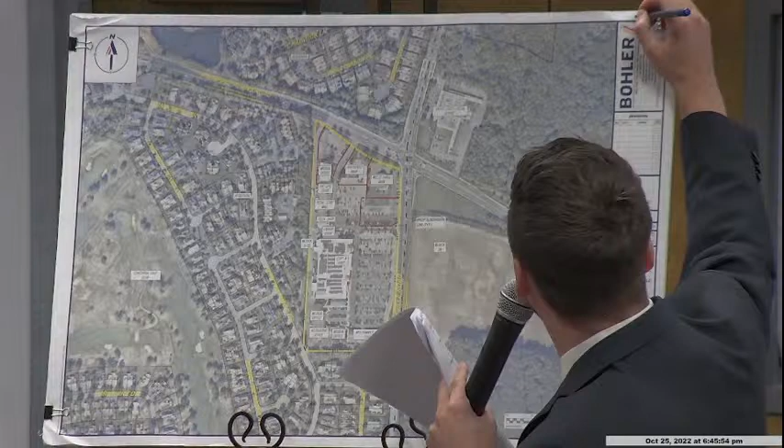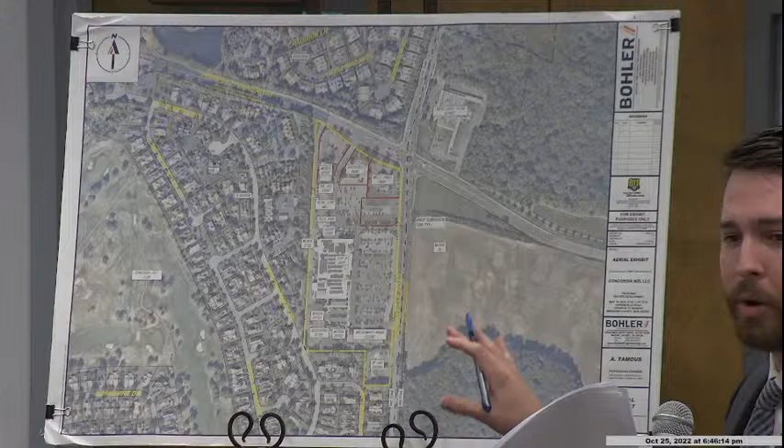This is an aerial image taken from approximately early October, which shows the site in question outlined in a yellow boundary on this plan. The site is located at the corner of Perrinville Road, County Route 625, and Prospect Plains Road, County Route 614. Surrounding the site you have residential, multifamily, and townhouse development to the west and south. On the opposite side of Prospect Plains Road there is additional residential housing. Catty corner to the subject site is the USPS Postal Service building, and to the east, on the opposite side of Perrinville Road, is an open farm field.

As Mr. Herbert mentioned, we are located at block 27.02, lot 27.01, taken from tax map page number 10. The site is located in the PRC zone, the Planned Retirement Community Zoning District. The existing use on the site is made up of many uses. The primary use is the existing Stop and Shop grocery store, and the surrounding uses consist of smaller retail uses such as a pizza shop, Mrs. Kumar's Indian cuisine, some medical office buildings, and a couple of bank parcels. It really functions as a shopping center, which is what the previous approval considered in 1983 for this project. It was classified as a shopping center based on the types of uses and the shared amenities provided on this site.

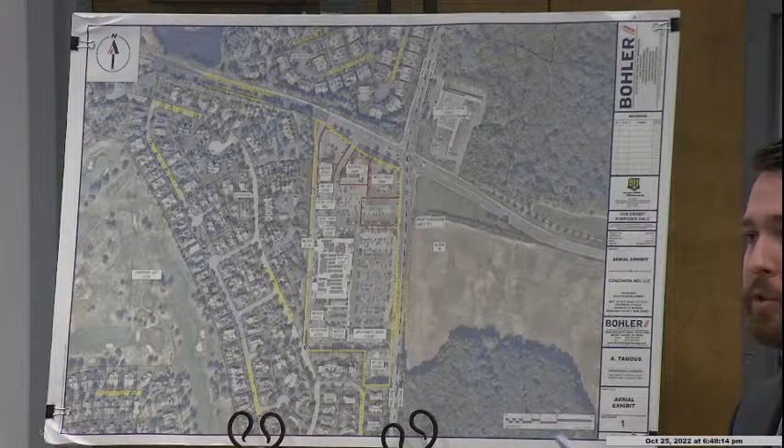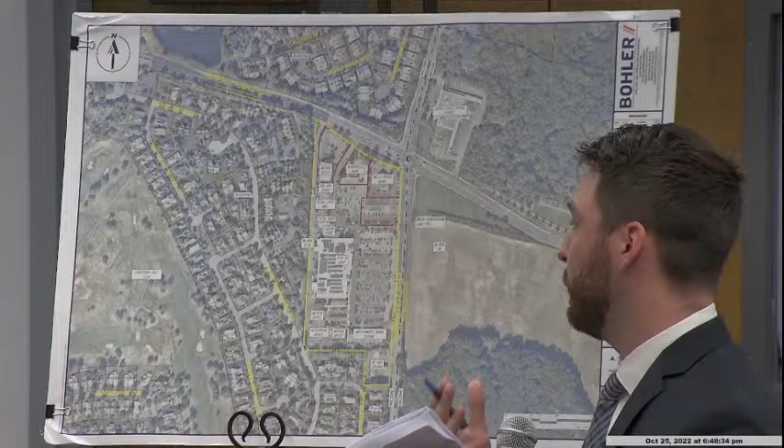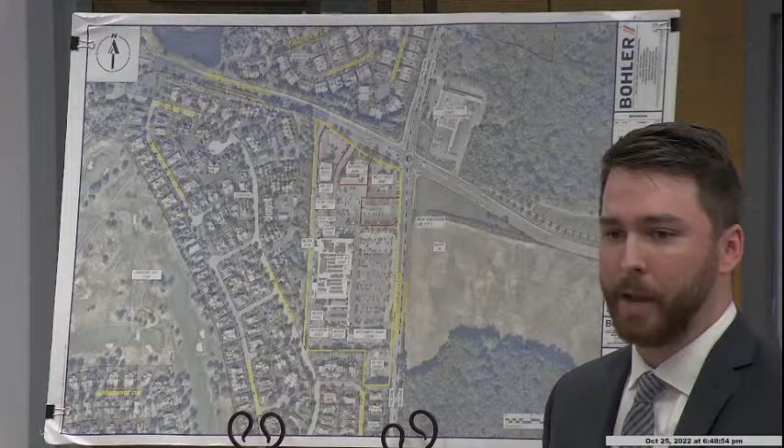You can see, maybe in detail, the number of parking spaces on the site, which we're going to be talking about a lot tonight. Currently there are approximately 646 parking stalls, based on the survey prepared as part of this application. However, the previously approved number based on that original approval for the shopping center was 602. Most of those parking stalls are utilized by the large use on the site, the Stop and Shop grocery store. You can see from this aerial image that most of the cars parked on this site are located in front of the grocery store. So one of the things we're trying to achieve with this application is to provide a little more parking in front of the Stop and Shop where it's most needed.

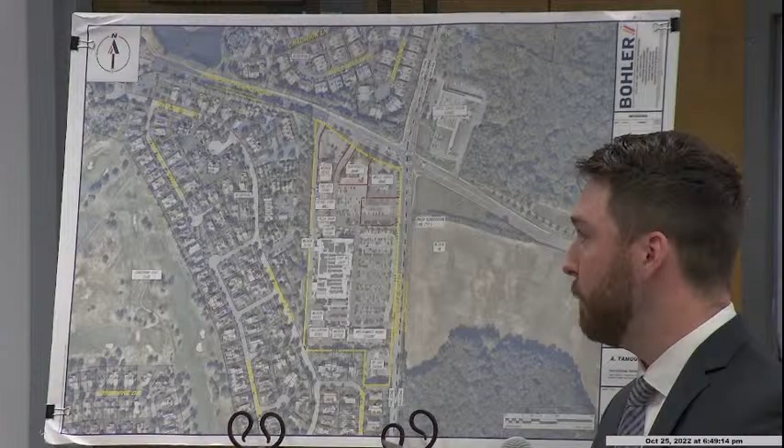You can also see on this plan with the red boundaries what the proposed subdivision for this project will look like. As Mr. Herbert mentioned, we are applying for a major subdivision application, which will add additional parcels within the existing shopping center. Those are outlined in red here, and I'll get into that once we turn to the proposed conditions shortly.

Access to the site is...

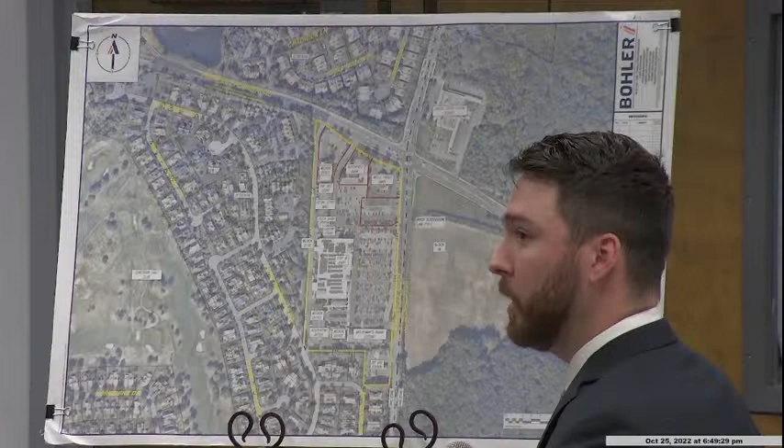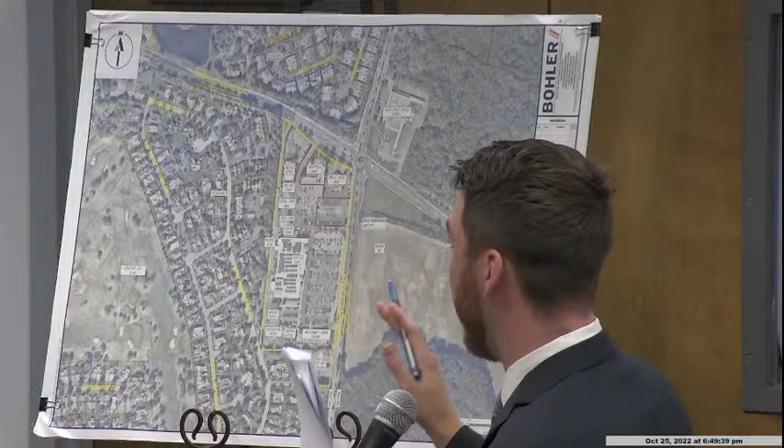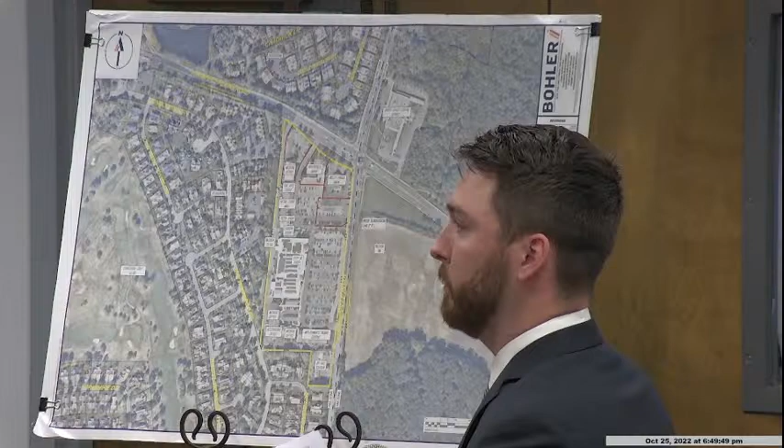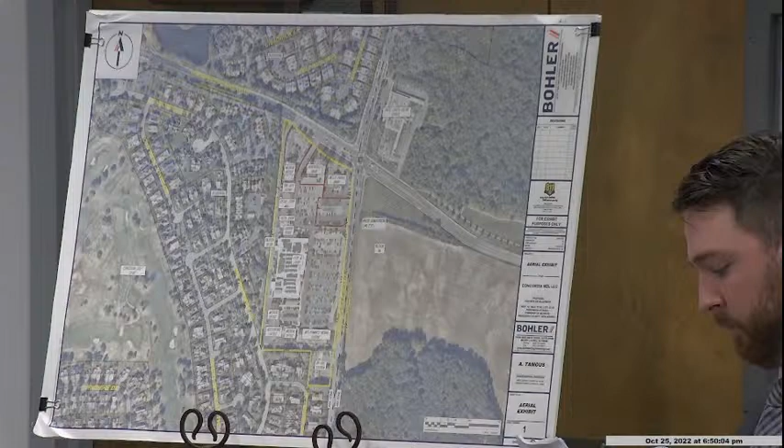I want to describe it for the record as well. I'd like to do that when we get to the proposed condition, you can see that a little bit better. This is what I'm going to recommend: after he gives his testimony and it's done, we'll take a recess. At that point we'll give the public a chance to see the outlines up close instead of interrupting as we go along. Otherwise we're going to be here for many nights. So let's go through the process. Everyone will get a chance to view it and see what's going on before anything happens, I promise you. Please continue. Thank you, Mr. Chairman.

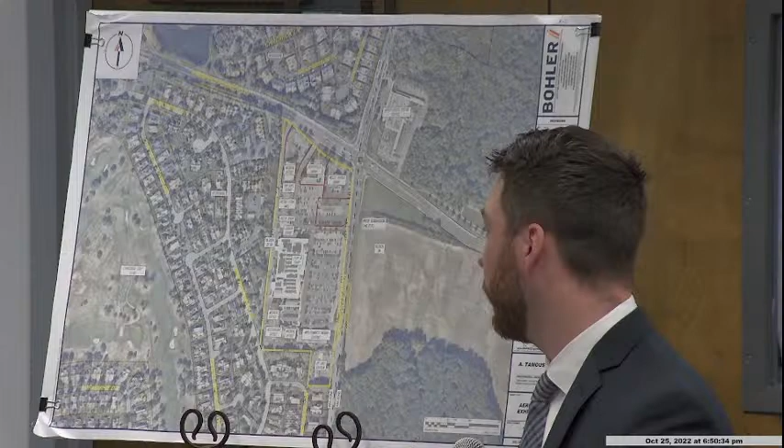Lastly, on the existing conditions, I want to talk about access to the site, which has a handful of driveways. There are 2 full movement access driveways located on Prospect Plains Road, and also 2 full movement driveways into the shopping center piece of this project along Perrineville Road. There are a couple of additional access points to the existing BP gas station located at the southeast corner, which are not to be changed. For that matter, none of the existing access points on the site will be changed as part of this application.

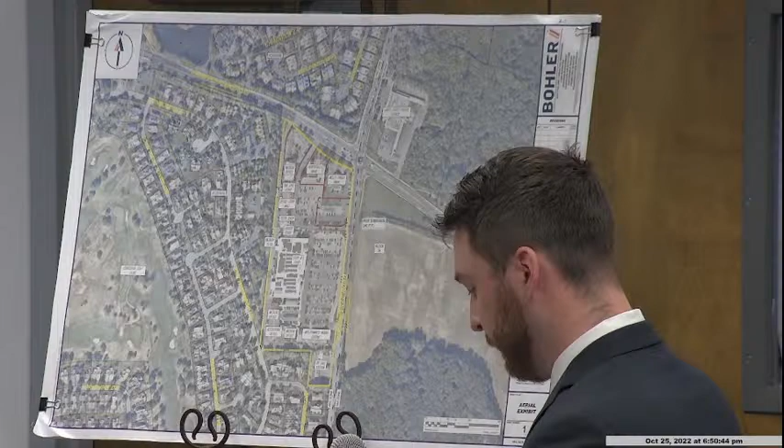With that, I'll move on to the proposed conditions unless the board has any questions on the existing. When you're done, we'll get to those. We'll get to the questions.

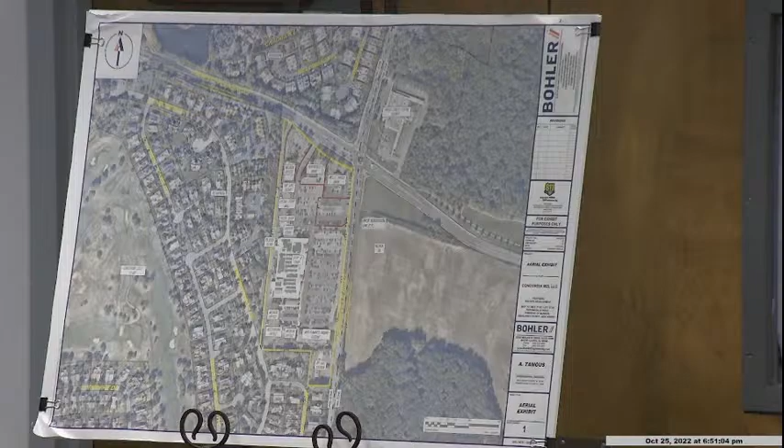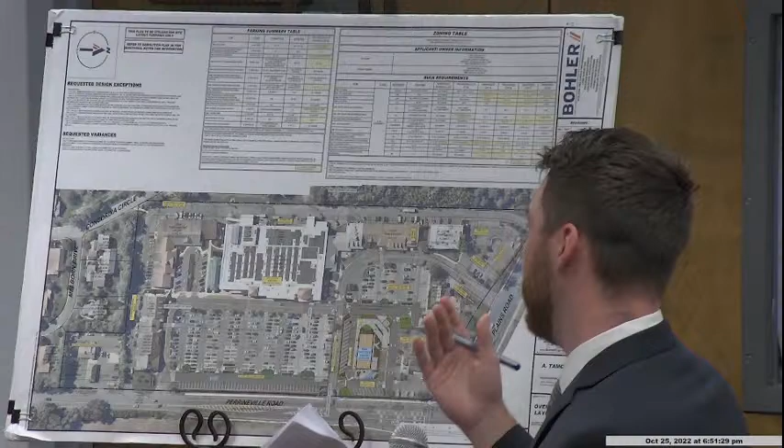Yes. This exhibit I will mark as A2. The exhibit is the overall site layout plan, sheet C-301, dated June 25th, 2021, last revised July 12th, 2022. This exhibit is a colorized rendering of the submitted site plan drawings that we provided to the board as part of this application. It's colorized for visibility and to show what the site may look like once it's constructed, as well as to provide a superimposed landscaping plan that was submitted, all for reference on one page.

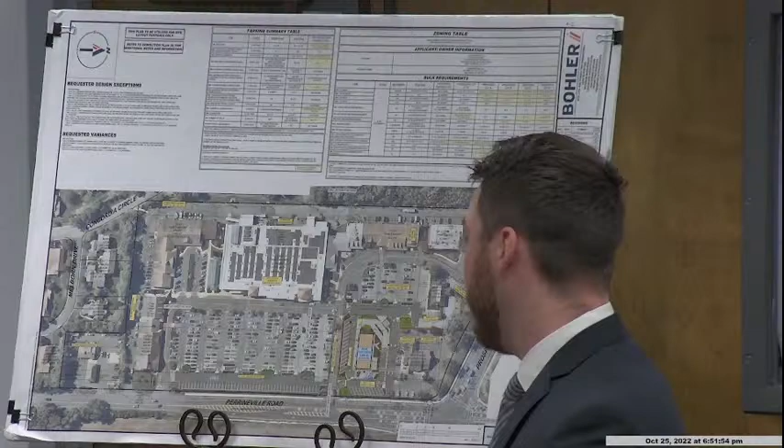As Mr. Herbert mentioned, we are proposing to construct a 4,439 square foot fast food McDonald's restaurant, which will contain 67 seats and provide a double lane, side-by-side drive-through configuration, which McDonald's considers their most efficient configuration. You see it very frequently across the nation and really across the world.

Let me turn the page here. The proposed restaurant is going to be located towards the northeast corner of the site. North is directed to the right side of this page, so a 90-degree rotation from the previous exhibit. The McDonald's restaurant will be located at the northeast corner, closest to the Prospect Plains Road and Perrineville Road intersection, adjacent to the existing Wells Fargo Bank.

The reason we've selected that location — there's a couple of reasons, but most importantly, it's the location on the site that currently utilizes the least amount of parking stalls or has the least parking demand. Looking at the aerial exhibit, you'll see that area of the site is very infrequently used for parking, making it a prime location for this restaurant.

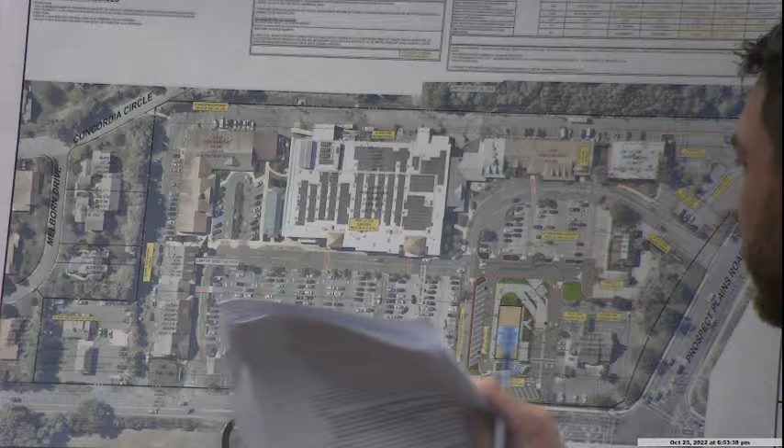Additionally, on the other side of the entrance driveway on Perrineville Road, further south of where this proposed restaurant will be located, we are proposing some site plan modifications to increase the total number of parking spaces in front of the existing Stop and Shop grocery store. I know it might be difficult for the public to see, but I'm sure you'll see it when we take a recess, as the chairman mentioned. This design, from an engineering standpoint, is much better for circulation and also provides an additional 20 parking spaces in front of Stop and Shop, simply by reconfiguring the parking lot.

We are not proposing a drive-through ATM, which was initially contemplated for this application. We have rescinded that from the application, and in lieu of the ATM, we will be providing an additional 4 parking stalls, which were not shown on the plan as it was submitted.

Just to reiterate, we are proposing a fast food drive-through restaurant, which is a non-permitted use within this zone. While it is similar to the pizza shop and the Indian cuisine restaurant, the drive-through component and fast food nature of this restaurant is not explicitly permitted in this zone. Therefore, we are requesting the use variance for this project.

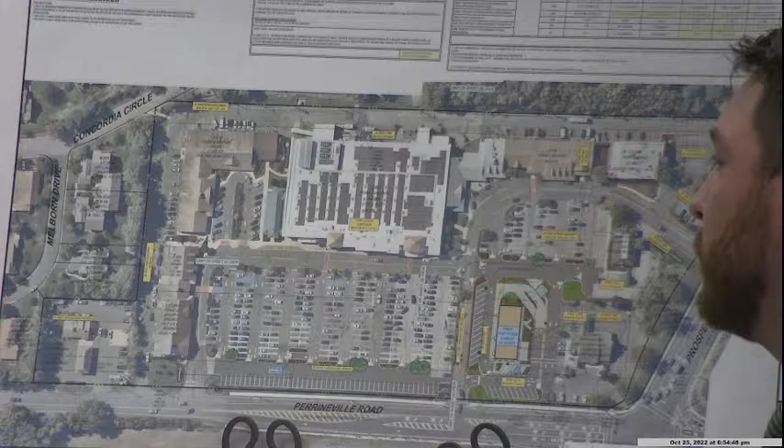The ATM also would have required a use variance application, but that is no longer necessary given the fact that we have eliminated that from the plans.

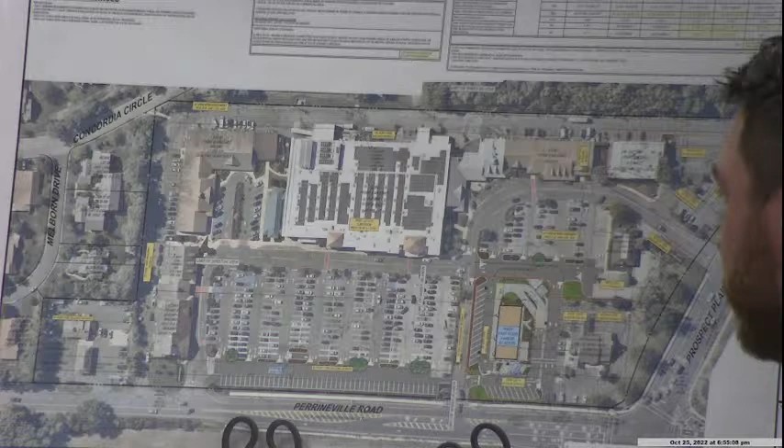I want to cover a couple of additional site plan improvements that were specific questions and comments raised by the board's professionals, which we are agreeing to incorporate. This will hopefully streamline the review through the comment letters as we proceed. One of those was interconnectivity between the proposed restaurant and the existing shopping center.

Previously, and on this plan, there are no sidewalks or crosswalks delineated for public access if you were to walk from the Stop and Shop to the restaurant. So we will be providing those. We will be agreeing to work with the board's professionals to find a suitable location for those, and that will be provided as a condition of any approval that we might receive.

Additionally, as shown on this plan, we are showing an outdoor seating area as part of the McDonald's restaurant. That also is going to be eliminated. That is not needed based on what McDonald's has indicated to us. So we will be eliminating that larger outdoor patio space in lieu of some additional landscaping that will be provided instead.

So the other lots that were proposed to be created as part of the subdivision plan. I'll identify them now. The existing lot 27.01 will be broken into 5 individual parcels, which we are calling lots A, B, C, and D for the first 4 new lots that are going to be out parcels on the northern side of this property.

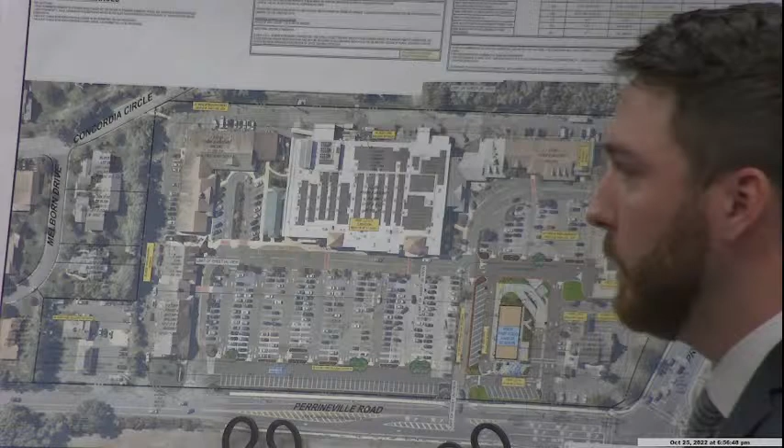The remaining land that will not be included in lots A, B, C, and D will remain as part of lot 27.01, or whichever tax number the tax assessor assigns, and that will remain inclusive of the Stop and Shop and many of the retail uses on the southern half of the site.

The McDonald's restaurant will be located on lot A. Wells Fargo Bank and the surrounding parking and drive-through area will be located on lot B. Lot C will include the existing Liberty Bank and its surrounding drive-through and parking area. Lot D will be the existing medical office building on the northwest corner of the site, also with adjacent parking and circulation areas.

Mike, use the microphone. Counsel, microphone, please. I can reiterate your question.

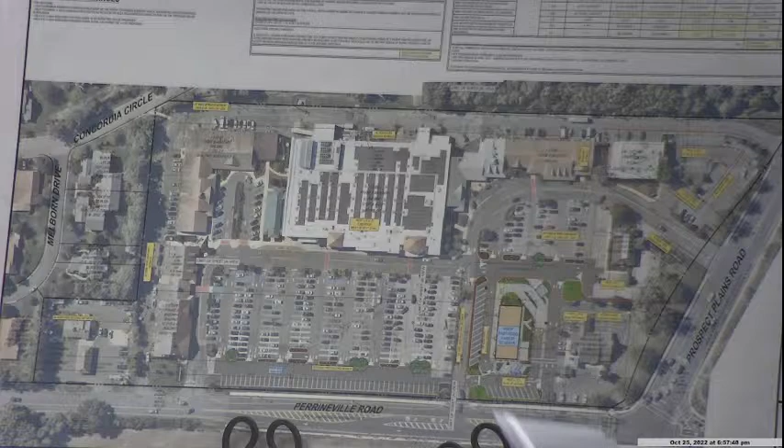Go ahead. His question was, this would be considered an economic or financial subdivision, as we call it in the industry, and the answer is yes. The reason for it is not to separate the ownership or really have it feel as a separate use on the property. It will still function as a shopping center. You will not notice any sort of difference just because of the subdivision. It's more for business and taxable purposes as a financial opportunity rather than to change the use or the feel of the site. Thank you.

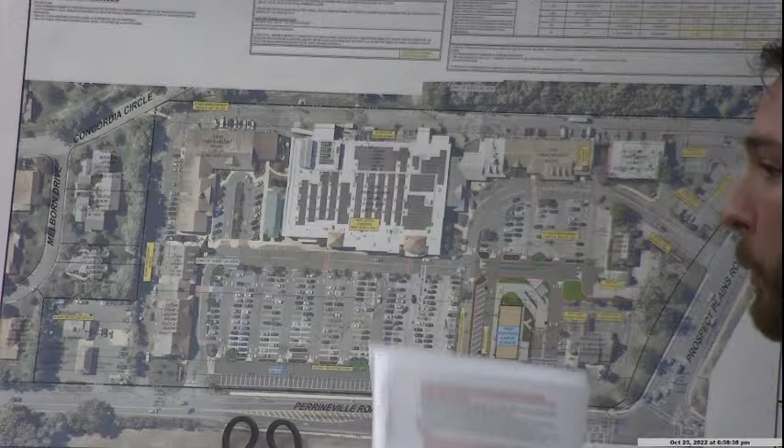So as I proceed, there are a number of variances that we need relief from this board this evening. Rather than go back and forth with interjecting them throughout the presentation, I do have a comprehensive list of all of the variances and the design exceptions that we will be requesting, which I can go through at the end of this, and we do have that list available to present to you, should that be beneficial.

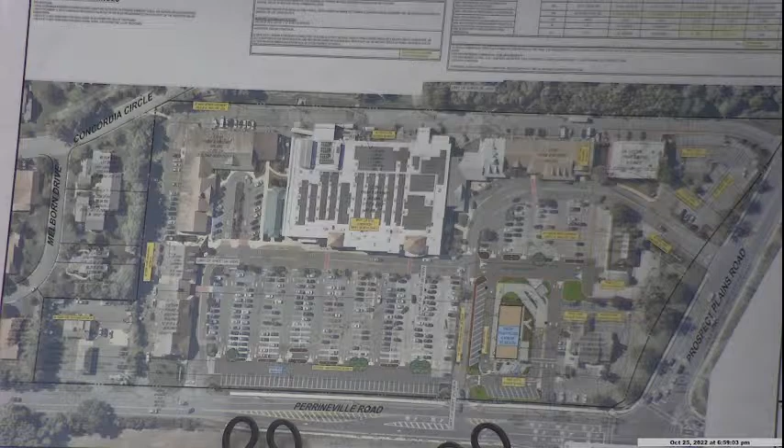Mr. Landro, one second please. Sure. Counsel, the handouts that were given out tonight, was that submitted to the township prior in your portfolio in the package? The black and white. We have black. Can you hear me now? Okay, I thought I had a loud voice. I apologize. These are the plans that were submitted, just upgraded with colorization so you're able to see them a little bit better.

Okay, so the original plan that doesn't indicate revision 3, and this indicates revision 3 — it's the same as 2, but just colored? That's correct, yes, with the landscaping superimposed on top of the site plan. Please continue. Thank you, Mr. Chair.

All right, I'm going to move into parking. So I mentioned 646 stalls exist currently on the site for parking as a comprehensive total. The total number for all of these uses, inclusive of the individual parcels we're proposing, will be reduced to 561. That's the total for the overall lot. Individually, I'll break it down per lot.

Lot 27.01, which is the remaining area that will not be subdivided, currently requires 471 parking spaces based on a floor area of 117,804 square feet. We are proposing 432 parking spaces in lot 27.01, which is an increase of 20 spaces compared to what it would have been if we were not proposing the parking improvements along Perrinville Road. Those provide an additional 20 stalls, which we feel is appropriate and necessary for the location on the site where they're most used.

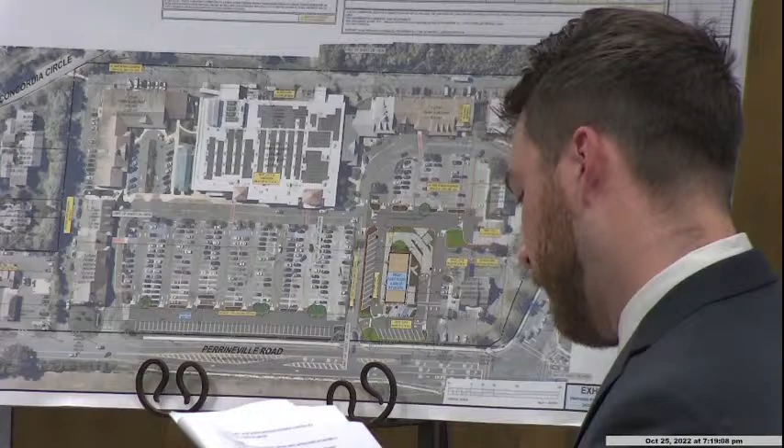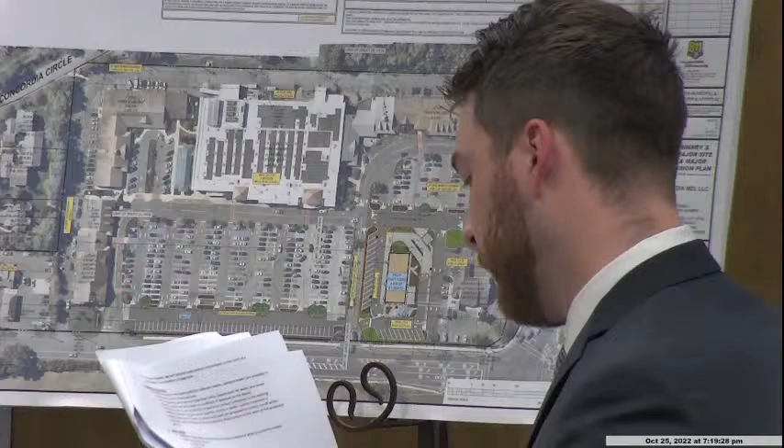There are a couple of other technical deficiencies on the lighting regarding foot candles at property lines and allowable minimum averages. We are requesting relief from that, mostly due to the configuration of the lot lines we're proposing. More specifically, there is a maximum allowable lighting value of 0.5 foot candles at property lines. We're proposing 4.0 foot candles and 2.4 foot candles for lots 27.01 and lot A, which is the McDonald's lot, respectively.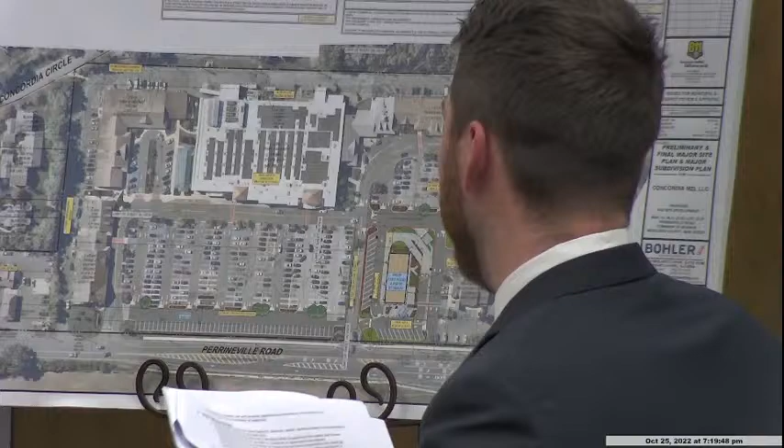Again, we feel that's appropriate given that there are access driveways along the property lines and that we want to illuminate them to an adequate level for the safety of the patrons visiting the site.

Lastly, I just want to mention that we did meet with the board's professionals and some members of the township at a technical review committee meeting on July 8th, 2022. We discussed the project, heard their thoughts and feedback, and workshopped this plan with them. Of course, we'll go through any remaining questions or comments in the letters from either Mr. Razumowicz or Ms. Apty, but we believe we're at a point now where the plan is more than sufficient to satisfy their concerns. And we'll work with them on any remaining comments to bring it to an acceptable condition.

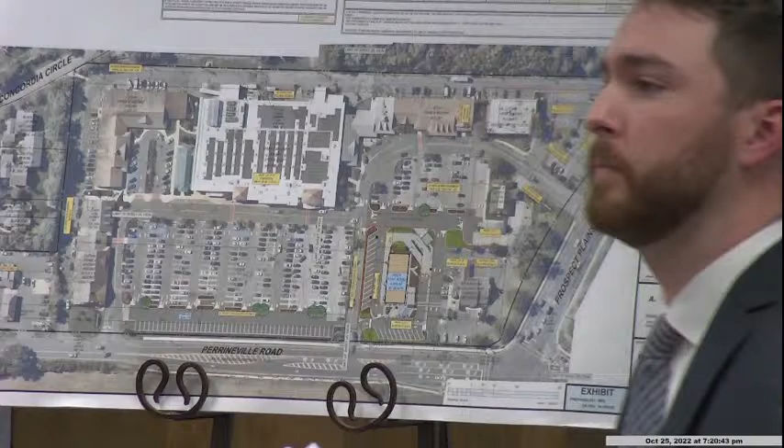Mr. Landro, with the exception of what was placed in the record, we are agreeing with everything in the letters from Mr. Razumowicz of October 13, 2022, and from Ms. Apty dated July 7, 2022, is that correct? I believe so, yes.

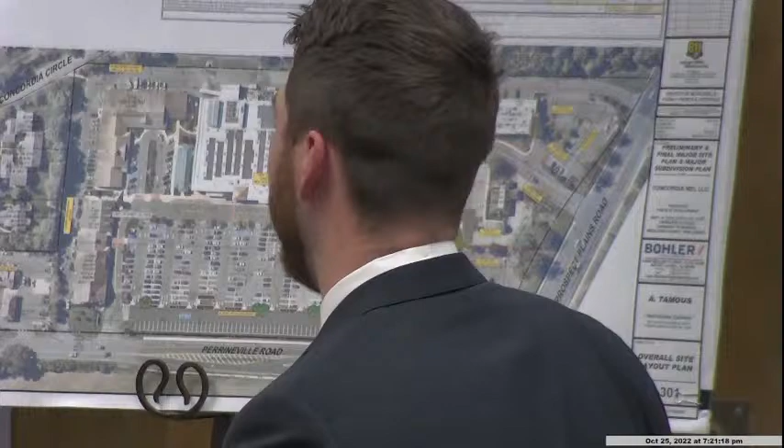So that concludes the overall summary of what we're proposing here. I'm happy to answer any questions the board may have. There's quite a lot to digest with this one, and I can also run through the full list of variances, but I'd want to get any direct feedback on the layout or design of the site itself before we go through those technical procedures. Thank you, Mr. Landro.

Mr. Lupo: Mr. Herbert elaborated that there was no homes around the area as far as pedestrians and the light problem, but there are 3,000 kids right down the road in a high school. I'm sure you individuals are aware that you're going to get a lot of foot traffic with kids. That intersection is a nightmare. Now you're going to bring these kids over there. It's going to be a mess. It's going to be a mess. And that's just my opinion. Okay?

Forget the residents, there's no residents there, but there are kids, and the kids are going to come. If we all lose our order, we're not going to get anything accomplished. If we keep interrupting, you're all going to waste your time here tonight, because we'll be back next month and the month after. Let's do it orderly, and let's get it done correctly.

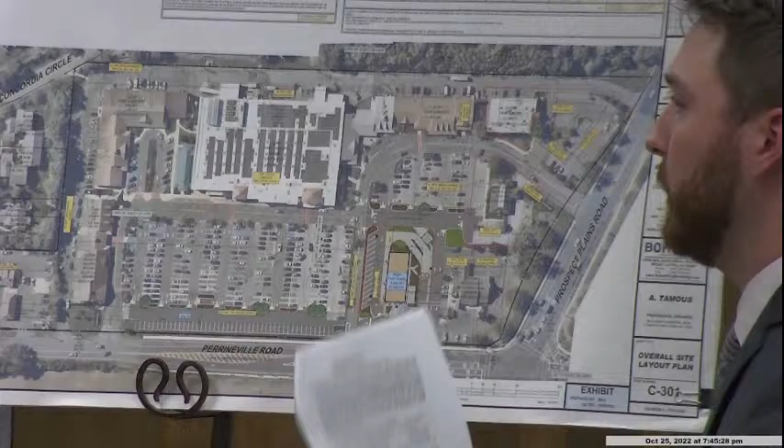At the new four-way stop-controlled intersection that we're proposing, we would provide a crosswalk and then a series of sidewalks and additional crosswalks to cross over a handful of those drive aisles, and then provide another crosswalk across that drive aisle down to the McDonald's use. So that would be the method of getting the interconnectivity to the storefront, along those new islands that we're proposing just to the west of the McDonald's pad.

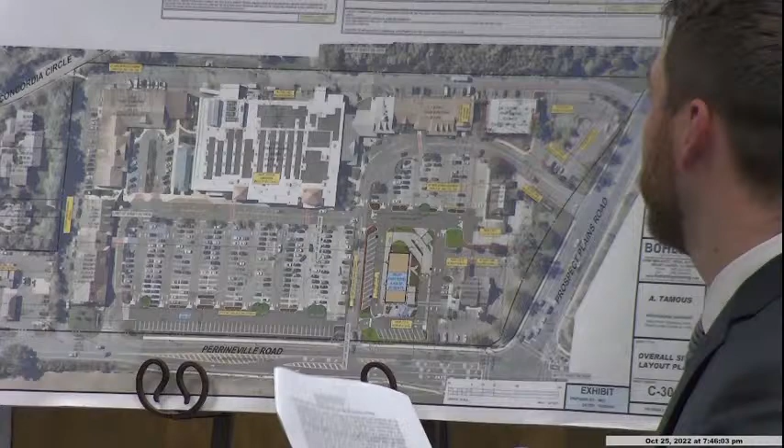Okay, in addition, looking at the whole site, there's no sidewalk access from Prospect Plains Road. I would request that you provide a sidewalk coming in from Prospect Plains Road to connect with the sidewalks, I believe near the medical building and the storefronts.

Understood, we can look at that. Again, that would require some coordination with the county as it is their jurisdiction for access, but that's something we certainly can look into. There are currently no sidewalks there, and those immediate uses are not really the most pedestrian-oriented in terms of the Liberty Bank and the medical office building. That's more of a vehicular destination, but we obviously could look at the addition of sidewalks for those areas should the board deem it necessary.

Well, that provides the connectivity to the storefronts, including Stop and Shop and the other stores that are there, the pizzeria, Chinese, etc. Yeah, understood.

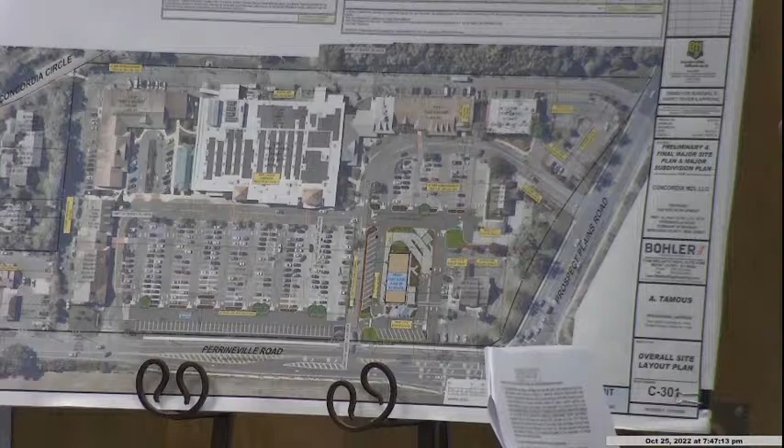The loading area — you're not providing a loading area for the McDonald's. You indicated you're going to have 2 or 3 truck deliveries per week. I believe you said they're coming when the store is closed. Is that correct? That's correct. So, and you're also going to have employees there to unload the truck? I can't speak to the number of employees, that's operational. Your hours are from 5:30 a.m. to midnight. That means you're going to be getting truck deliveries between midnight and 5:30 a.m. in the morning, based on your testimony. The specific timing I couldn't speak to, but yes, that's correct.

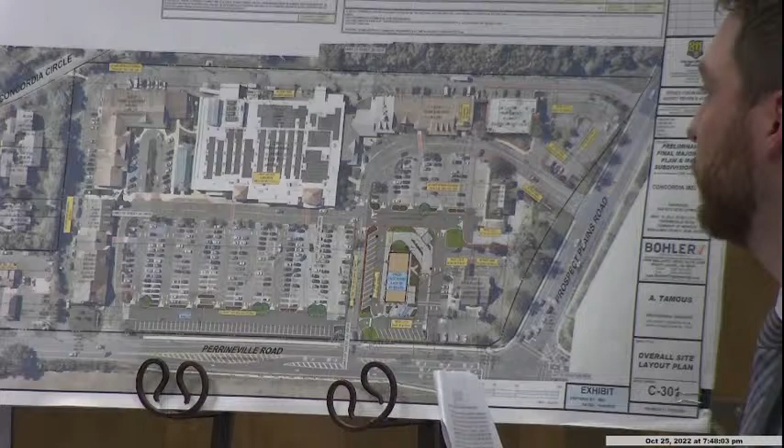Okay, well, I think that's outside of the hours. And the other thing is, if you're closed, you're going to have employees coming in during closed hours. So we need a lot more testimony on that and how you're going to control it, because I've seen tractor trailers at McDonald's at all times of day, and I don't know how you're going to control that here. So do you have someone else who's going to testify on that? We do. Thank you.

You're setting up the subdivisions, obviously for financial reasons, separating the businesses. Cross-access easements, you're going to be providing them for all the lots and throughout the properties? That's correct. I didn't see that noted on the mapping, so that'll have to be provided there as well. We have no issue with providing that.

That's fine. With regard to the Wells Fargo lot, you have a two-way drive aisle that appears to be one of the main drive aisles to accommodate the McDonald's, but it's totally on the Wells Fargo property. Who's maintaining that?

Is that now becomes Wells Fargo's responsibility to maintain that main drive aisle, or will that subdivision line be relocated? If I could clarify, are you speaking of the immediate two-way drive aisle just to the south of the row of parking in front of the Wells Fargo?

That's correct. That drive aisle will be located on Wells Fargo's property, as it is a means of their customers circulating in and out of their site.

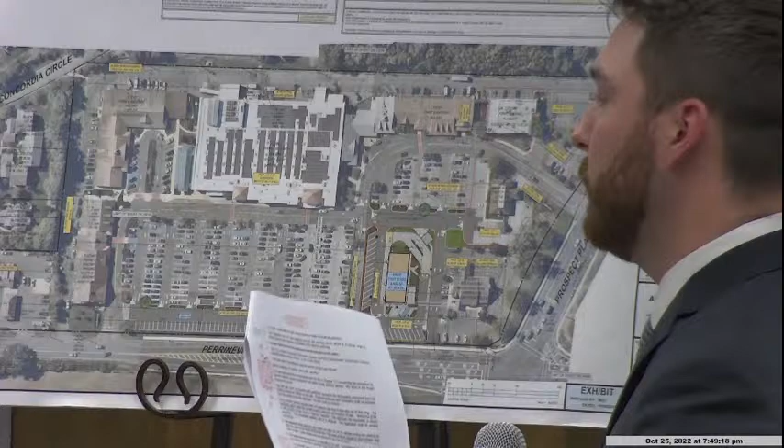So our owner and operator can provide the specifics of what that maintenance agreement would look like and what will be in the reciprocal easement agreement, but it will remain on Wells Fargo's parcel.

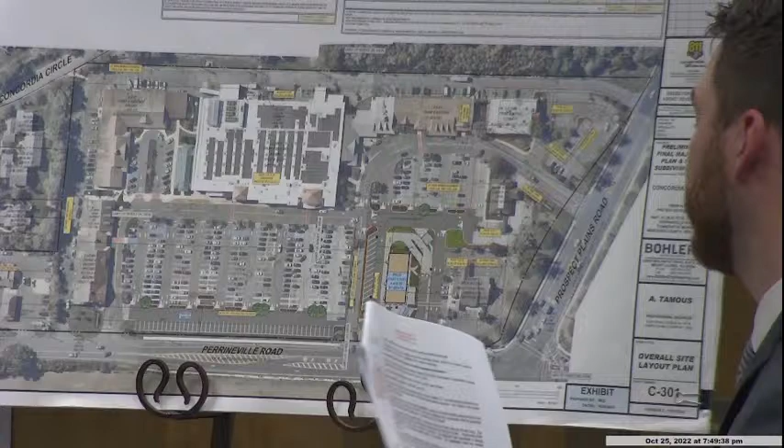Okay, and that provides the exit for McDonald's as well. That's correct. Okay, I'll wait for clarification, and I guess I'll hold any other comments for the other professionals and reserve the right to speak with the engineer again.

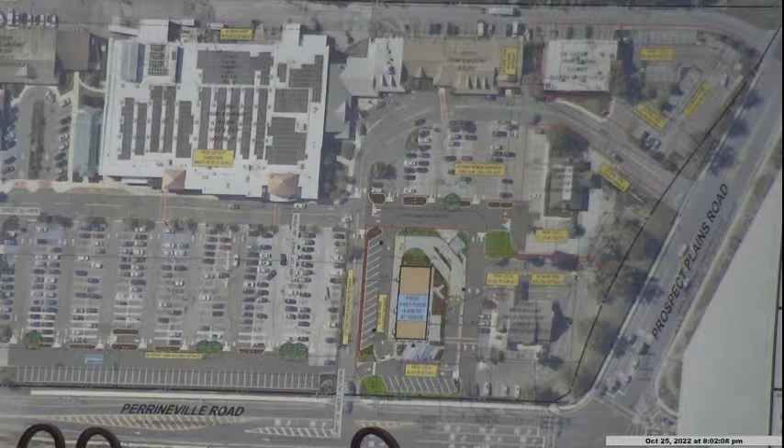There's a handful I have to hit here, so I'll do it by lot that we are proposing as part of the subdivision, and that will hopefully keep things organized. I'll start with Lot A, which is the proposed McDonald's lot.

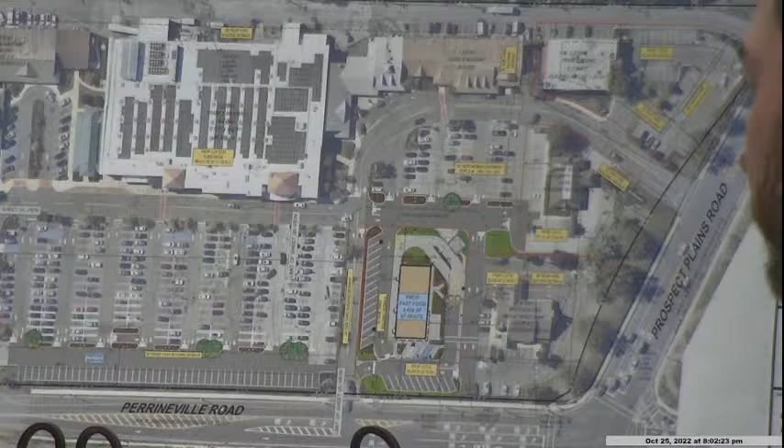We do have a number of bulk variances based on the PRC and NC zoning criteria. And actually, I'd like to mention, before going much further, the site is located in the PRC zone, but based on the prior approval for the shopping center, we utilize the NC neighborhood commercial zoning district requirements.

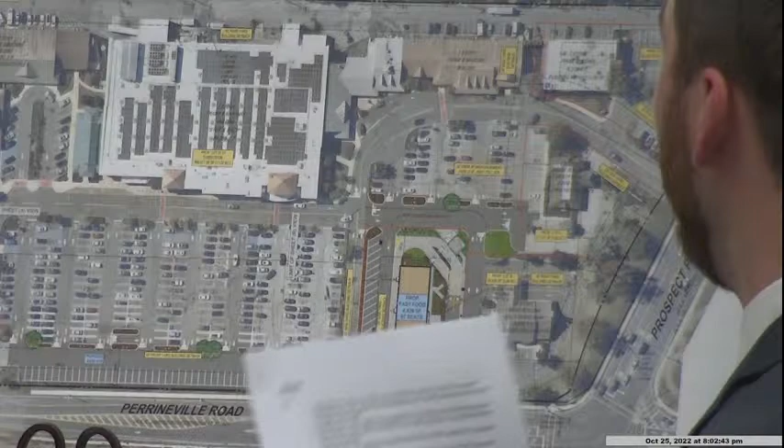We coordinated with Ms. Apke and the entire township and the board's professionals to confirm that those requirements are still appropriate for the shopping center.

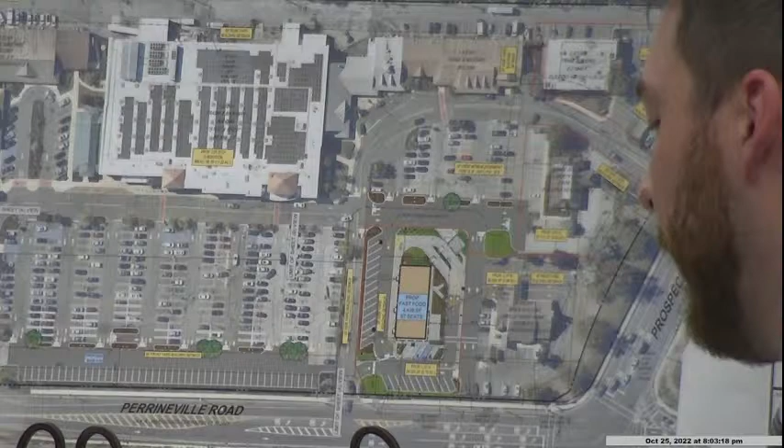So the actual PRC zoning requirements are not applicable for this particular project based on the project history and how it was originally approved. So with that, I'll go into the Lot A bulk variances that we are looking for this evening.

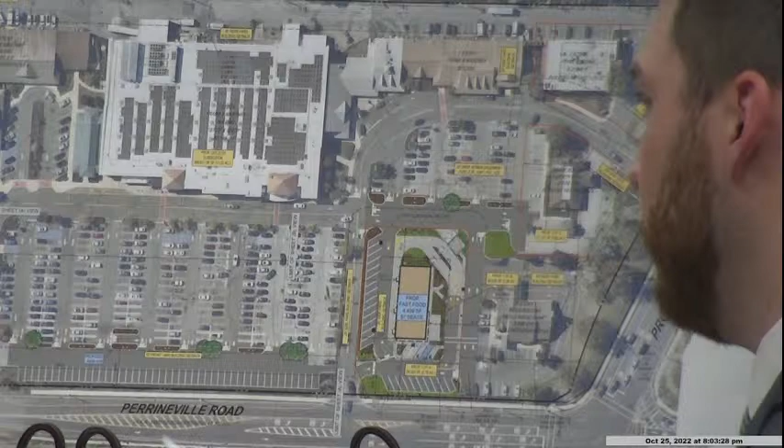The first handful are straight from 108 Attachment 2, which is the bulk requirements for the NC zone. Minimum lot area of 40,000 square feet is required.

40,000 square feet is required, and for Lot A, 34,520 square feet is proposed, which is slightly less than 40,000. The minimum lot width and lot frontage for Lot A is required to be 200 feet.

We are proposing 154 feet for the lot frontage and 133.6 feet for the lot width, which is less than the required 200.

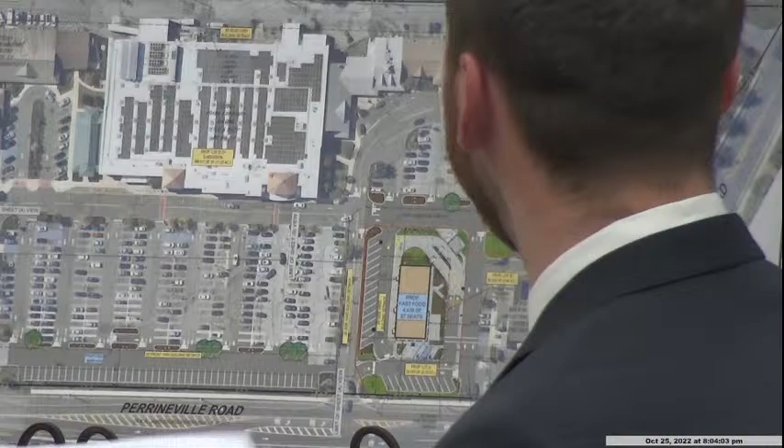May I just clarify, making sure it's 34,520 square feet for the lot area of Lot A? Yeah.

Oh, I see. Yeah, 34,520 - sorry, I reversed the numbers. Just making sure for the record - 520. And the second thing, the lot width is 154.8? Yes. Thank you.

The maximum impervious coverage allowable for Lot A is 60%. We are proposing 80.8%. The minimum buffer for right-of-way for Lot A of 60 feet is required, and we are proposing 6.1 feet. Again, that maintains the existing separation, but it is a new lot, so we are requesting the relief.

Similarly, there is a buffer from the property line for Lot A of 60 feet required, and we are again proposing 6.1 feet. Additionally, any buffer that is proposed is supposed to have berming, which we are not providing given that the width is reduced. Therefore, we are requesting relief from the berming requirement as well.

For the number of wall signs, we did cover this, but I'll reiterate: one is permitted based on section 108.10.1.k. One is permitted and 5 are proposed. Maximum sign area for wall signs of 40 square feet is permitted, where 55.4 square feet is proposed for the northeast and eastern facades, while the southern facade we are proposing 41.4 square feet.

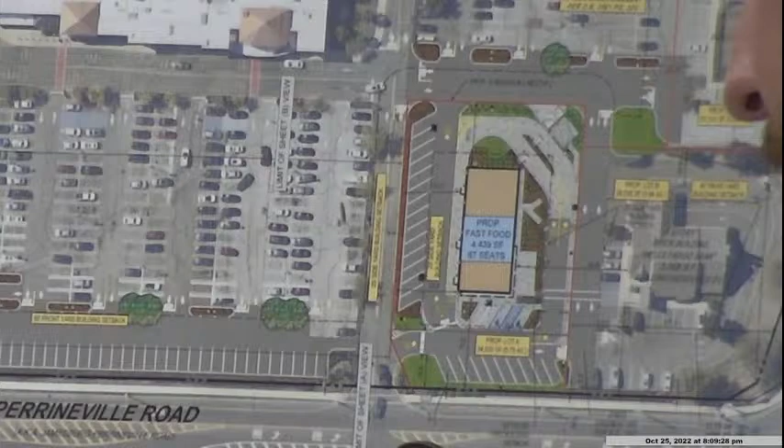So that covers Lot A, and I'll move on to Lot 27.01, which is the remaining shopping center area. Again, the number of parking stalls that are required is 471, and 432 are proposed for that parcel.

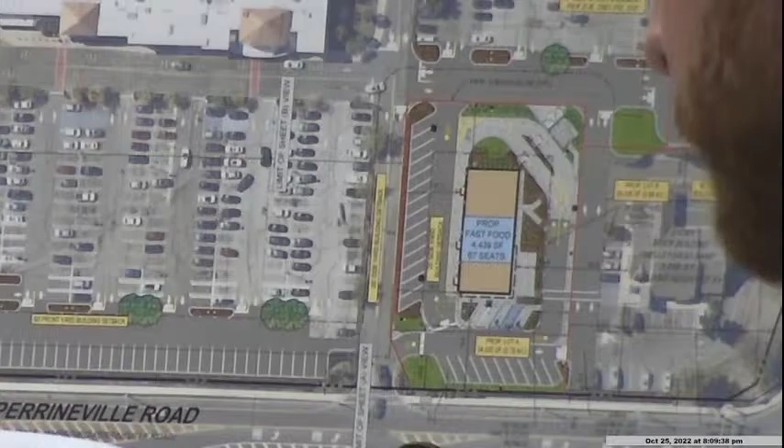For bulk requirements, a minimum side yard setback of 25 feet is required, whereas 17.6 feet is proposed. That is located at the northwest corner, adjacent to the 2-story medical office building. That separation is to the new property line that is proposed. So we're not proposing any new structures or distances to the exterior property line, but since there's an internal property line we are proposing, that setback is reduced to 17.6 feet.

Maximum building height of 35 feet is required. Within this parcel, lot 27.01, we are not proposing any changes to any of the existing structures. I believe one of the dimensions for the Stop and Shop grocery store is measured at 36.7 feet, which is what we have noted on the plans. We can review and confirm if that really is the exact dimension at its highest point. But again, we are not changing the existing condition on that lot, so no changes are proposed, and therefore we're requesting the relief as an existing nonconformity.

For parking lots of 20 or more spaces, landscape islands are required. We've covered this a couple of times, but again, we want to provide as many parking spaces as we can while still providing some landscaping. So instead of losing approximately 20 or 25 additional parking stalls to provide that landscaping, we're requesting that relief to maximize the number of stalls.

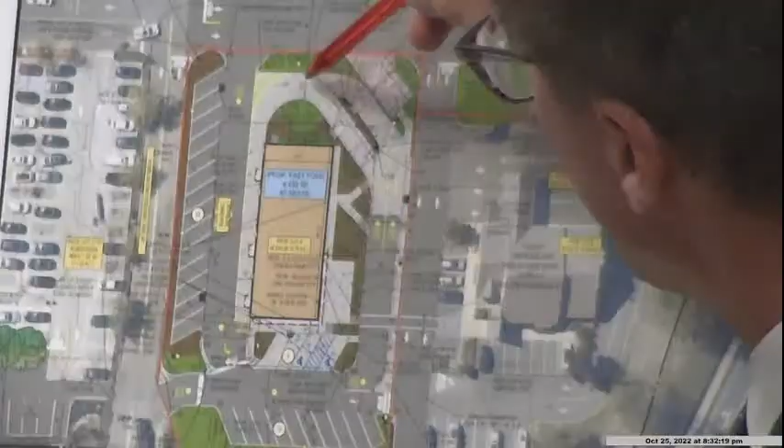Okay, so south side right here. So right here where the drive-through, I'm sorry, go ahead. So where these two lanes are here for the drive-through, that's the delivery. If you see the walkways that are here, those are ramps, and he wheels them right into the storage area or to the freezer.

So it's right in the drive. Maybe you could also show right here. Look up right there, Mr. Chairman? Okay.

So you're saying the tractor trailer is now going to access around the drive-through? It's going to drive through the drive-through to unload and then proceed through the drive-through to get out of the site? Yes, because he'll be pulling in right here. If you can see here, here's the walkways and the ramps, and then he'll drive in here, offload, and then drive out.

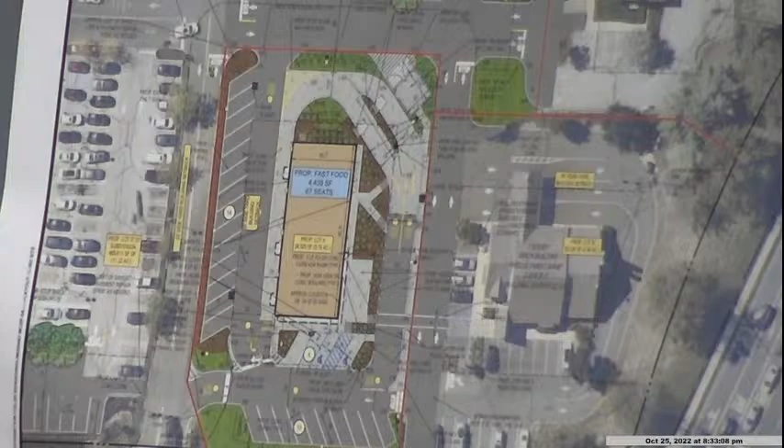So to the attorney, I'd like to hear from your engineer later. Maybe you can comment about that. Sure, because I thought there were some clearance issues and other obstacles that a tractor trailer may not be able to get through. Sure, we have our traffic engineer to testify to that too, but Mr. Landreau is available. Go ahead.

So I do have a truck circulation exhibit, which is appropriate at this time. Was that provided to the board as part of the application? I do not believe it was a submitted plan, so we'll mark this, and we absolutely can submit it going forward.

Counsel, while he's setting that up, how many other things haven't been submitted to this board to review before coming before the public?

Wow, promotion. Congratulations. Yeah, I was in front of a judge today, so I apologize. Microphone, wait a minute.

Mr. Chairman, we have submitted everything that's been requested. The document you see now is just to further illustrate what we're trying to explain to the board. These are supplemental documents. We're not trying to pull the wool over anyone's eyes or be non-transparent. We're just trying to show how things work. This is essentially just a close-up showing where the trucks are, and we will submit that. We will be glad to submit that as part of this project as well.

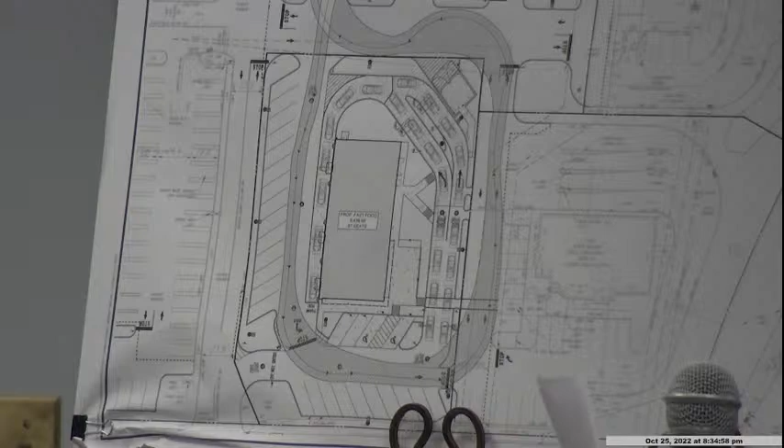Continue. So I'll mark this A5. Yep. This plan is entitled WB-50 Truck Turning Exhibit, dated October 25th, 2022, and prepared by Bohler Engineering.

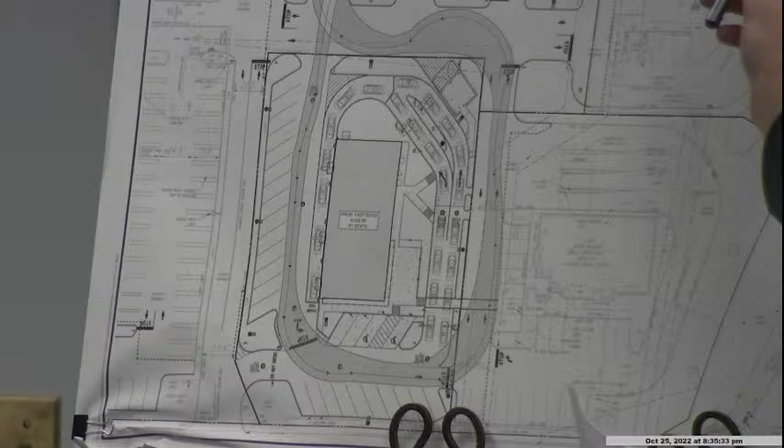This shows the anticipated circulation pattern for the delivery vehicle coming off of Prospect Plains access driveway. The county route on the north side of the site will maneuver into the site, make a left internal to the site as it approaches the main storefront. And you can see as it starts to travel eastbound, it can come down through and into the drive-through receiving lane where people would be receiving their orders.

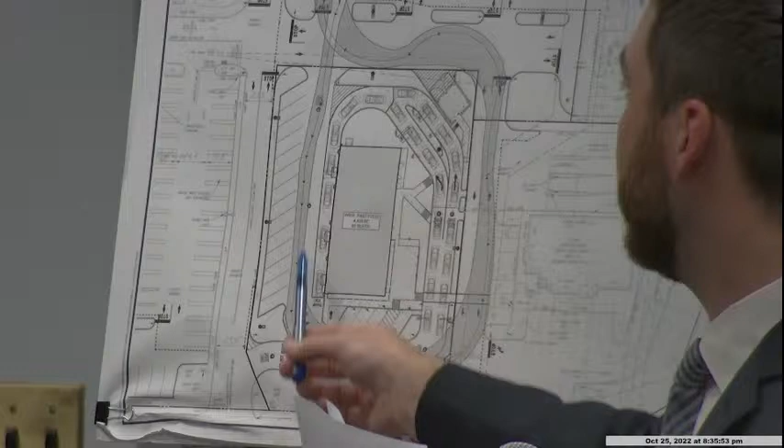There are a number of ways that it could happen, as Bill explained, but the primary mode of delivery would be for the truck to sit in that straight and narrow path on the south side of the building, where there is a receiving door just adjacent to the drive-through lane. And that drive-through lane, of course, would not be in operation during that time, as it's an off-hours operation.

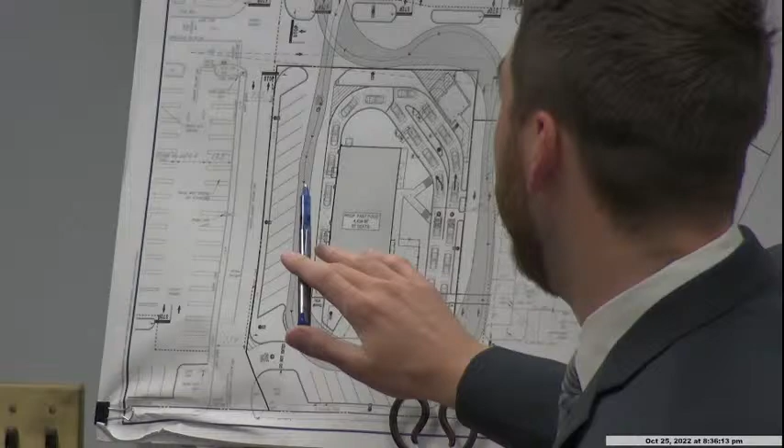So Mr. Landro, if you could just again point to where the truck would sit for the delivery. Yeah, the truck, in my understanding, would be just to the south of the proposed building, adjacent to the row of angled parking spaces, also adjacent to where the pickup from your drive-through order would occur at the pickup window.

Is that not a direct conflict with the operations manager? He said it's totally on the opposite side of the building where the sidewalk is. Now we're on the drive-through.

It's not, I think we're just a little turned around with regard to the other exhibit. Mr. Landro, again, could you explain how the truck would come in? What Mr. Landro is testifying to is how it will occur, and I'll get concurrence from our other witness.

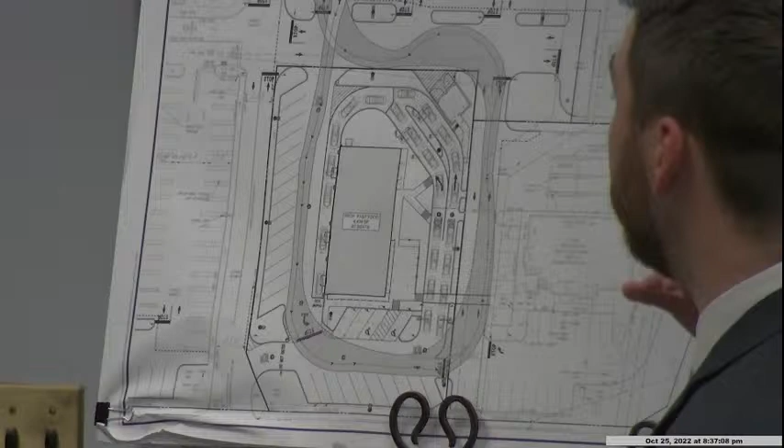The truck would enter the site from Prospect Plains Road, use the existing drive aisle along the front of the retail buildings, make a left going eastbound towards Perrineville Road, which would directly line up with the pickup lane of the drive-through just to the south of the building. That is where the truck can most easily fit and where the loading and unloading operation can occur.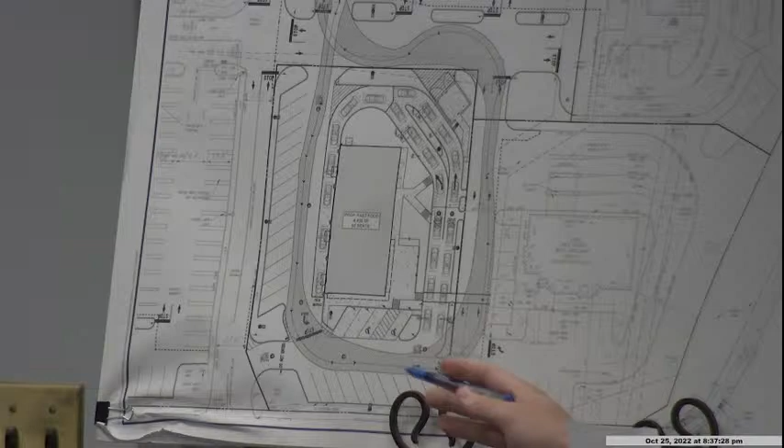However, to exit the site, the truck would then have to loop around the front of the store along Perrinville Road and back to the west, where the truck could also load and unload if that was the operator's preference. There is interconnectivity for sidewalks and pedestrian and loading on either side, so they can fit in both locations.

However, I will say that the drive-through lanes themselves are not designed to accommodate a WB50 vehicle due to the clearance bars, menu boards, and other infrastructure. That is correct.

So basically, Mr. Dykeman, what you said before is inaccurate? No, it's not inaccurate. There's two ways we can do this, so it works either way. It depends on site size and width. A lot of our stores do everything off on the drive-through side, but we have more space than we're going to get here.

We also have stores that do this off of that ramp there. In that door, we can bring it inside and go in. You can also walk around with the walkway, to go into the freezer, into the stock area. So there's two ways to do it. It can go either way.

Vinny, hold on. You just said there's two ways to do it. He just said there's not two ways to do it, right? He did say that. Well, if you have to do it on the other side, the north side, and he has to drive through the lanes, what'll happen to the signage? Because you just said you can't do that.

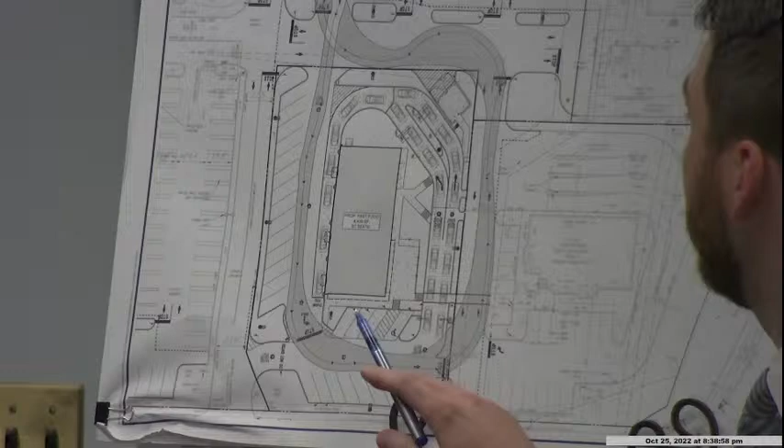He's saying you can do it. I believe Mr. Dykeman is saying the adjacent drive-through lane just to the north of where the actual entrance point into the drive-through queue occurs would be where the truck would do the loading maneuver, not within the drive-through lanes themselves. Correct. But then he'd have to drive forward, right? Or would he back up? Are you saying he's going to back out of there?

No, as shown, it might be difficult to see, but there's no way to, once you're in those lanes, you can't go right. I'm looking at your map. The truck would not be entering the drive-through lane. Oh, so it would be on the Wells Fargo property, not on McDonald's property? If they chose to do that, they would unload on the adjacent lot, not McDonald's lot. That's what you're telling me right now. I think his testimony was you could do both.

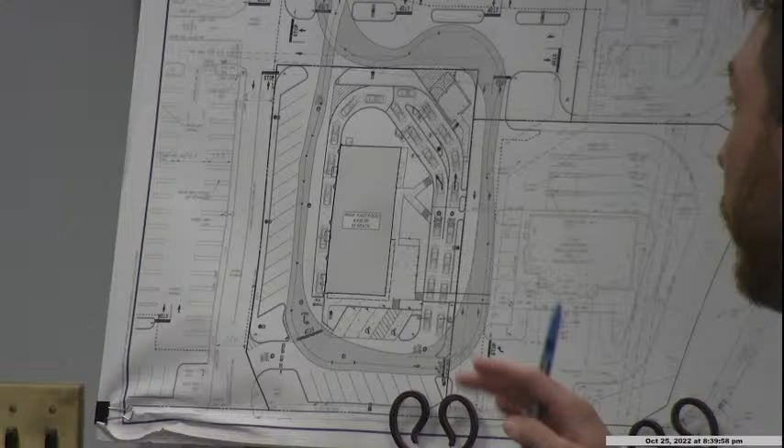You could do either, it's up to them. Is that correct, Mr. Landro? That is correct, and also the truck is designed to work in that location. That is the access path for the truck. So what you're proposing is either the south side or the Wells Fargo property, right? I'm proposing that the truck operation occur on the McDonald's property to the south of the building. Okay, thank you.

Mr. Chairman, another question? Yeah, sure, Mark, go ahead. Different subject.

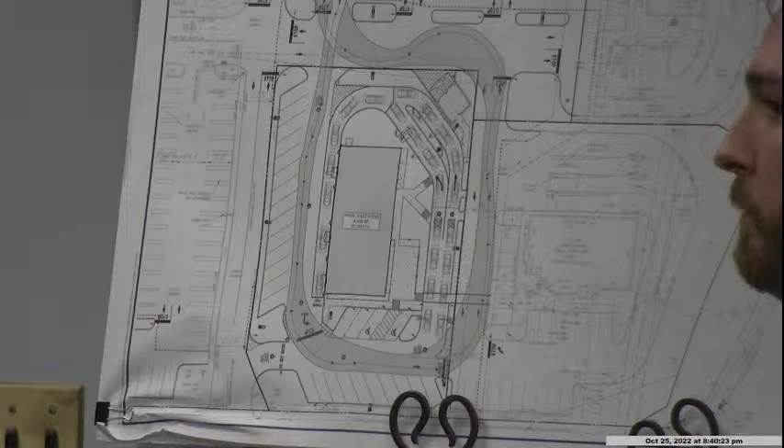Mr. Dykeman, you indicated that you have people that are going to walk around your site and pick up garbage. Is that correct? Yeah, they go out with a cart and a dustpan broom, and they travel what's called a travel path, and they go around our area of property. Will they be walking the entire property, including the shopping center? No, it's just the McDonald's.

How are you going to confine the garbage blowing from McDonald's into the other part of the properties? I guess we'll have to make arrangements. I don't know, because right now we have a problem with garbage blowing across onto Perrinville Road and across the street into the farmland, the preserved open space land. So that's a big issue.

Typically, what we've done in the past when we're in shopping centers with restaurants, we talk with the different vendors and we all kind of share in that. We can do that, that's not a problem. We don't mind picking up trash, it's fine. That's something we're going to want to see. What kind of arrangement do you have for cleaning up the garbage that's blowing all over the entire property?

Yes, and we already presented the McDonald's plan, but we have an overall plan as well. And on another note, not to go back to the loading/unloading, is there an architectural plan or a floor plan provided?

Yes, we have an architect here, and he will be going through all those. Okay, because I would think unloading would be based on where the access doors are in the floor plan. So whether it's the south side or the north side, that would depend on the layout inside your building.

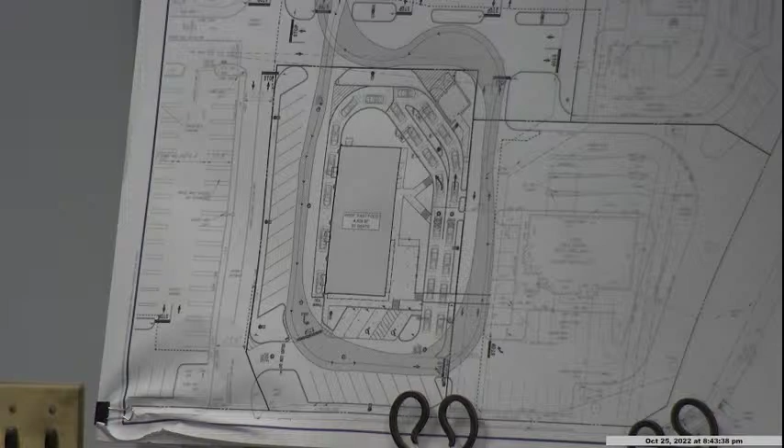So this meeting, I am making now an official motion to adjourn this meeting till next month. And in that interim, you have this time span to set up a TRC to get everything in order. Thank you, Mr. Chairman, my motion's on the table. Do I have a second? Madam Secretary, roll call please.

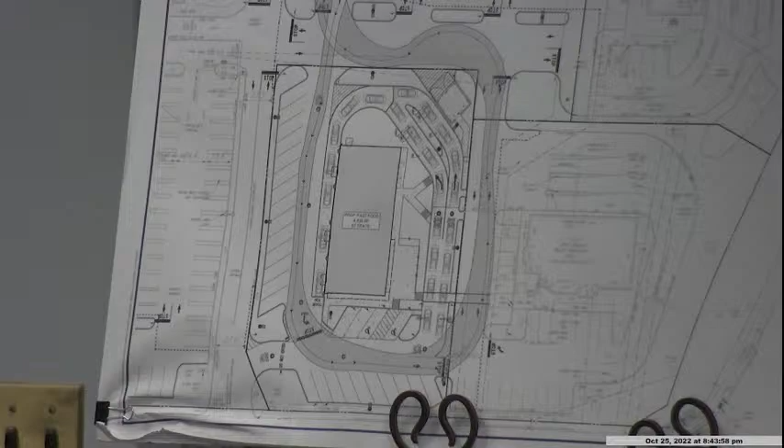Ms. Damiani? Yes. Mr. Lupo? Yes. Mr. Masters? Yes. Mr. Tanzi? Yes. Mr. Cole? Yes. Chairman LaFada? Yes.

I want the public to know we're not going to require them to renotice. Okay, so everyone is aware next month's meeting is November 29th at 6:30 in the same place. We will continue then. There will be no re-notification.

Thank you, Mr. Chairman. We will listen to the public in a second. As soon as we wrap them up, there's not much we're going to be able to answer or help you with because we're stopping them now. So you may want to reserve your questions to next time. If it's something pertinent with respect to tonight, we will be more than happy to open the public portion when we get there.

Well, just for the record, when the public portion of this meeting happens, it's public comment on anything other than this application. So the board cannot receive comments from the public on this application. They've stopped the hearing on the application. So the public portion for this application will occur at the next meeting. Okay?

Yeah. We're still in the middle of a meeting. We're still in the middle of a meeting, sir.